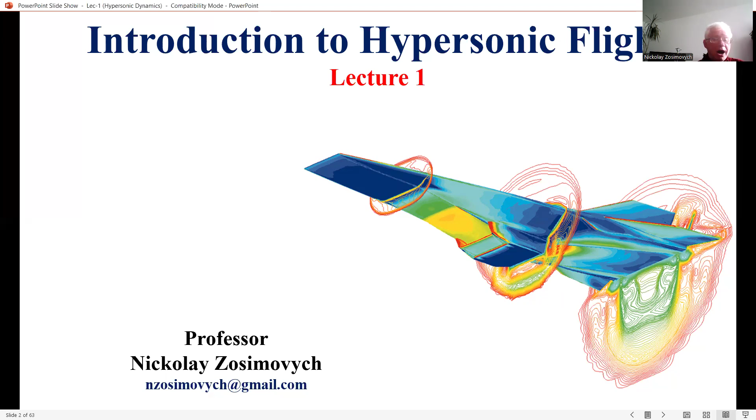These are more than just interesting questions. They are important questions that demand an answer, and this lecture supplies the answer. The preliminary truths supplied here set the stage and the tone for the rest of our discussions in this module.

A study of hypersonic flow is fun. It can be technically demanding at times, as we will see, but it can also be fun. So sit back, relax, and especially enjoy this first chapter. Let it give you a smooth takeoff on our flight through the worlds of hypersonic and high temperature gas dynamics, a flight that is both intellectually and professionally rewarding.

On this slide, you may see some of the recommended textbooks. Let's start with the basic history of hypersonic flight now.

The day is Thursday, 24 February 1949. The pens on the automatic plotting boards at South Station are busy tracking the altitude and course of a rocket, which just moments before had been launched from a site 3 miles away on the test range of the White Sands Proving Ground. The rocket is a V2, one of many brought to the United States from Germany after World War II. By this time, launching V2s had become almost routine for the crews at White Sands. But on this day, neither the launcher nor the rocket is routine.

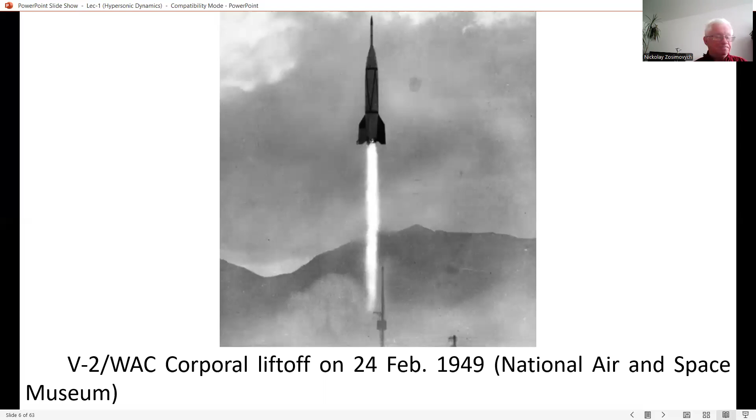The scene shifts to the former Soviet cosmodrome in Kazakhstan. The time is now 10:55 hours Moscow time on 12 April 1961. A strange spherical object has just landed under the canopy of a parachute. The surface of this capsule is charred black, and it contains 3 small viewing ports covered with heat-resistant glass. Inside this capsule is Flight Major Yuri Gagarin, who just 108 minutes earlier had been sitting on top of the rocket at the Soviet cosmodrome at Baikonur.

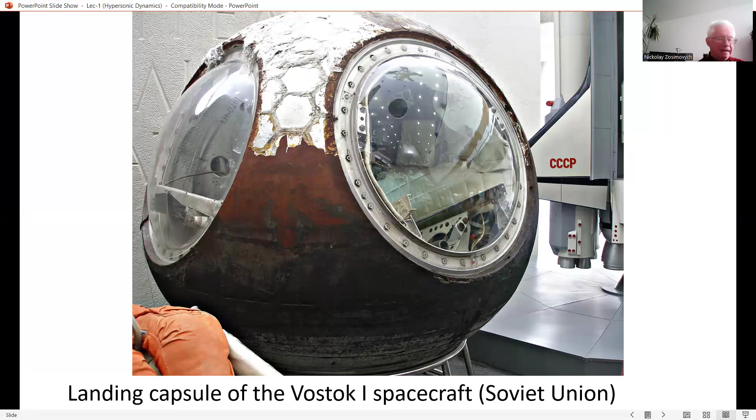What partially transpired during those 108 minutes is announced to the world by a broadcast from the Soviet news agency TASS at 9:59 a.m. After this announcement, Major Gagarin's orbital craft, Vostok 1, is slowed at 10:25 by the firing of a retro rocket and enters the atmosphere at a speed more than 24 times the speed of sound. 30 minutes later, Major Yuri Gagarin becomes the first man to fly in space, to orbit the Earth, and safely return. On that day, 12 April 1961, Yuri Gagarin becomes the first human being in history to experience hypersonic flight.

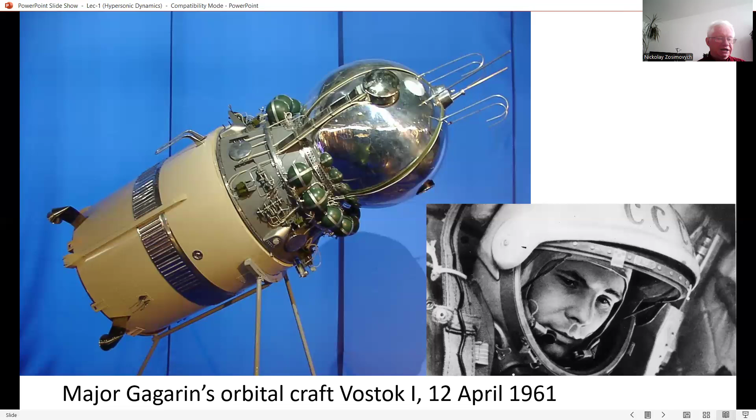On 5 May, Alan Shepard becomes the second man in space by virtue of a suborbital flight over the Atlantic Ocean, reaching an altitude of 115.7 miles and entering the atmosphere at speed above Mach 5.

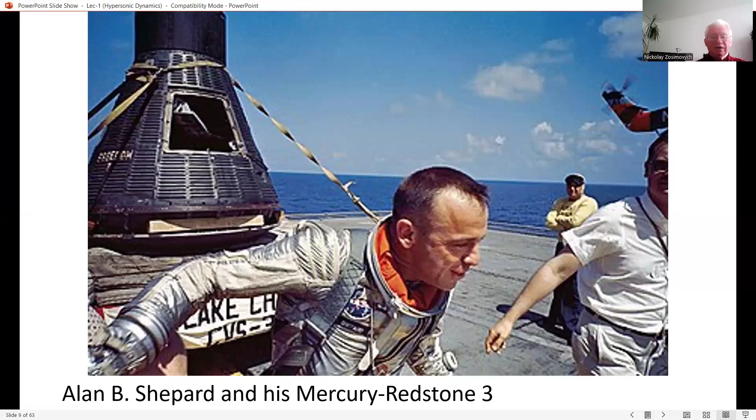Then on 23 June, US Air Force test pilot Major Robert White flies the X-15 airplane at Mach 5.3, the first X-15 flight to exceed Mach 5. In so doing, White accomplishes the first mile-per-second flight in an airplane, reaching a maximum velocity of 3,603 miles per hour. This record is extended by White on 9 November, flying the X-15 at Mach 6.

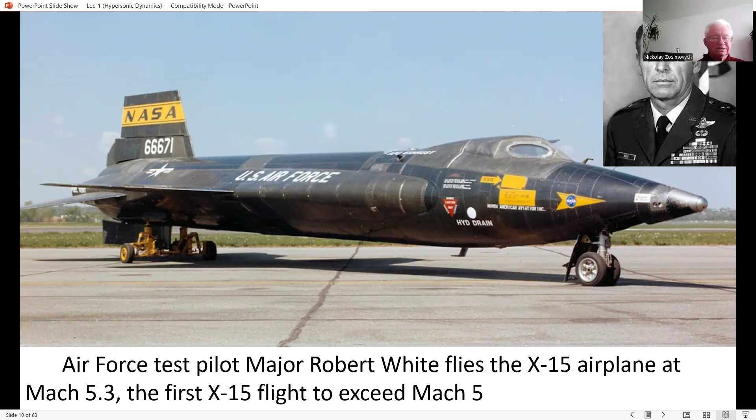The preceding events are historical firsts in the annals of hypersonic flight. They represent certain milestones and examples of the application of hypersonic aerodynamic theory and technology. The purpose of this lecture, our course here, is to present and discuss this theory and technology with the hope that the student and professional will be motivated and prepared to contribute to the hypersonic milestones of the future.

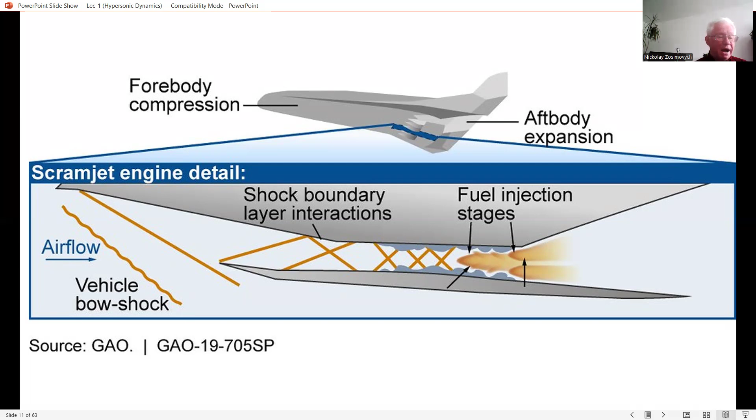Let's start with hypersonic flight importance. The development of aeronautics and spaceflight from its practical beginnings with the Wright brothers' first airplane flight on 17 December 1903, and Robert Goddard's first liquid-fueled rocket launch on 16 March 1926, has been driven by one primary urge: the urge to allow us to fly faster and higher.

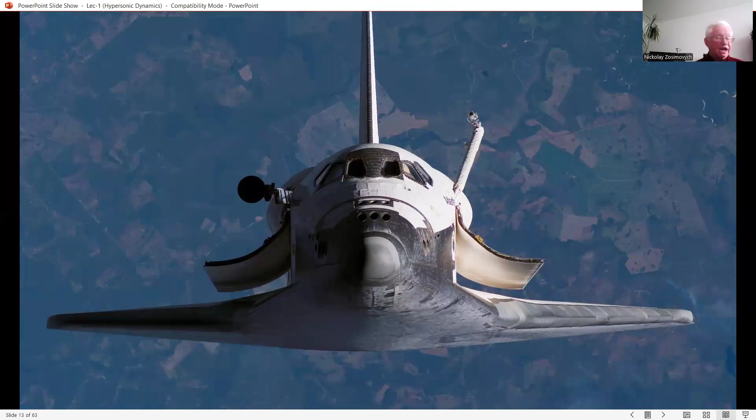Anyone who has traced advancements in aircraft in the 20th century has seen an exponential growth in both speed and altitude, starting with the 35 miles per hour Wright flyer at sea level in 1903, progressing to 400 mile per hour fighters at 30,000 feet in World War II, transitioning to 1,200 mile per hour supersonic aircraft at 60,000 feet in the 1960s and 1970s.

This was highlighted by the experimental X-15 hypersonic airplane, which achieved Mach 7 and an altitude of 354,000 feet on 22 August 1963, and finally capped by the Space Shuttle, the ultimate in manned airplanes, with its Mach 25 re-entry into the Earth's atmosphere from 200 miles low Earth orbit.

The point here is that the extreme high-speed end of the flight spectrum has been explored, penetrated, and utilized since the 1950s. Moreover, flight at this end of the spectrum is called hypersonic flight, and the aerodynamic and gas dynamic characteristics of such flight are classified under the label of hypersonic aerodynamics, one of the primary subjects of our lecture course.

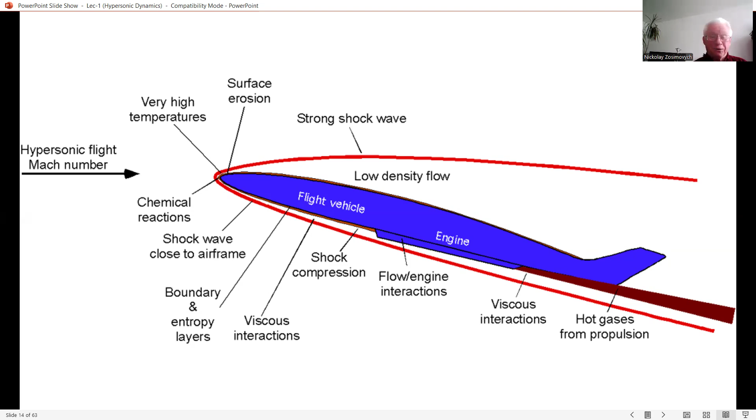Hypersonic aerodynamics is different from the more conventional and experienced regime of supersonic aerodynamics. These differences will be discussed at length in Lecture 3, along with an in-depth definition of just what hypersonic aerodynamics really means. However, we can immediately see that such differences must exist by comparing the shapes of hypersonic flight vehicles with those of more commonplace supersonic aircraft.

In this case, we may say the edges are almost sharp enough to pose a hazard during ground handling, with a low aspect ratio of 2.45 for the straight wing itself, all designed to minimize wave drag at supersonic speeds.

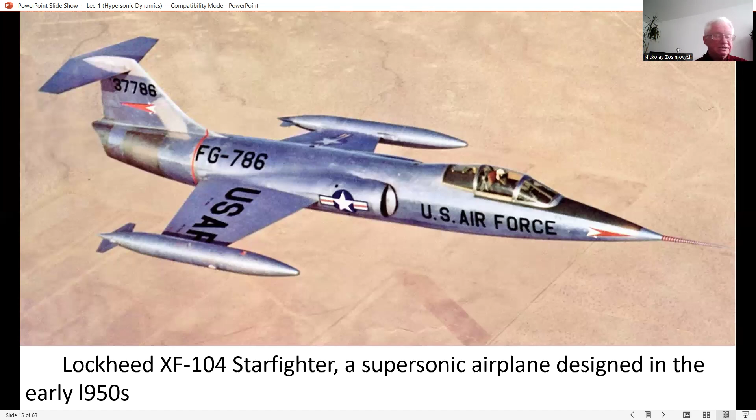To design a hypersonic aircraft for flight at much higher Mach number, it is tempting to utilize these same design principles, only more so. Indeed, such was the case for an early hypersonic aircraft concept.

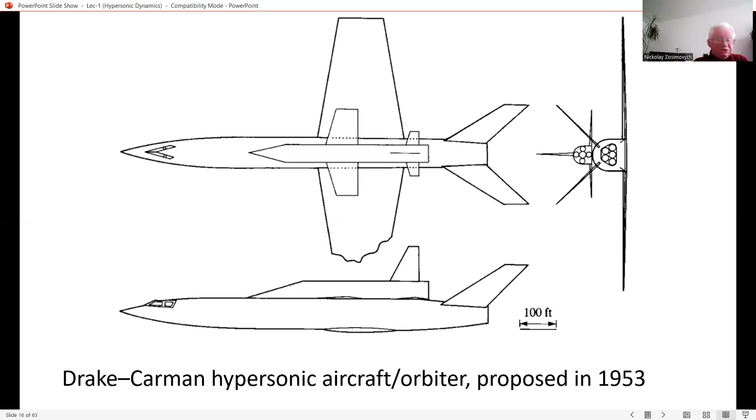Here we see an early concept for a hypersonic booster or orbiter combination, where each aircraft has a sharp nose, slender fuselage, and thin, low aspect ratio straight wings—the same fuselage features seen in the F-104, except the aircraft in this slide is designed for Mach 25. Imagine that. However, in 1953, hypersonic aerodynamics was in its infancy.

The X-20 design utilized a sharply swept delta wing with a blunt, rounded leading edge and a rather thick fuselage, with a rounded rather than sharp nose. The fuselage was placed on top of the wing so that the entire undersurface of the vehicle was flat.

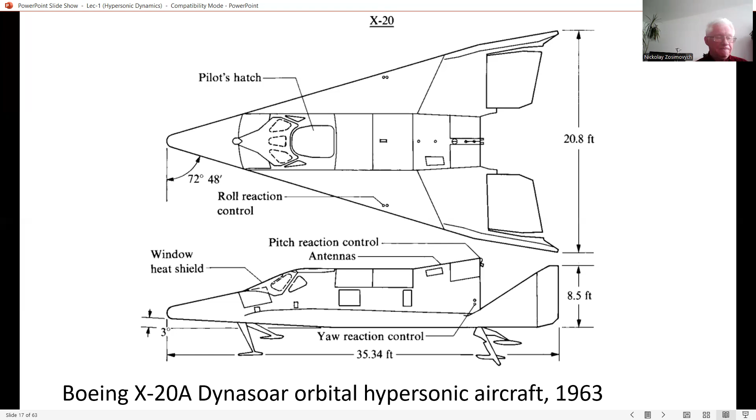The X-20 was intended to be an experimental aircraft for rocket-powered flight at Mach 20. Eclipsed by the Mercury, Gemini, and Apollo manned spacecraft programs, the X-20 project was cancelled in 1963 without the production of a vehicle. However, the X-20 reflected design features that were uniquely hypersonic and were later contained in the space shuttle.

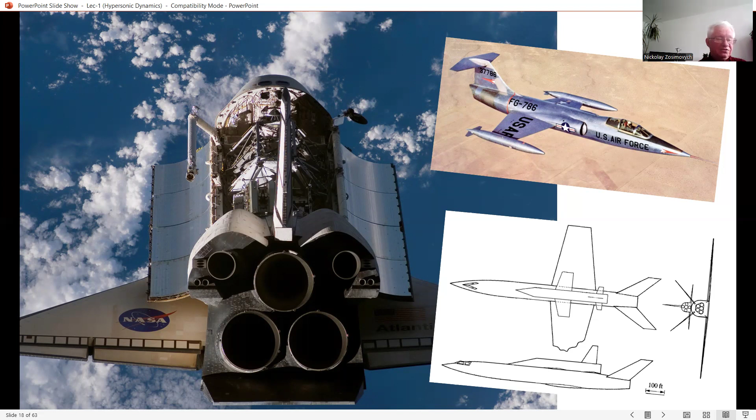To be objective, we must realize that many considerations besides high-speed aerodynamics go into the design of the vehicles shown in this slide. However, to repeat once again, the important point here is that hypersonic vehicles are different than supersonic vehicles, and this is in part because hypersonic aerodynamics is different from supersonic aerodynamics. Be careful with this, okay?

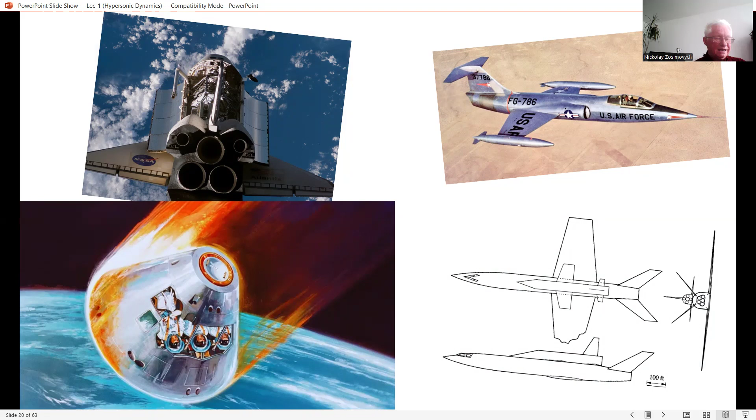Hypersonic flight, both manned and unmanned, has been successfully achieved. However, at the time of this lecture, it is by no means commonplace. The era of practical hypersonic flight is still ahead of us, and it poses many exciting challenges to aerodynamicists. Let us briefly examine some new ideas for modern hypersonic vehicles.

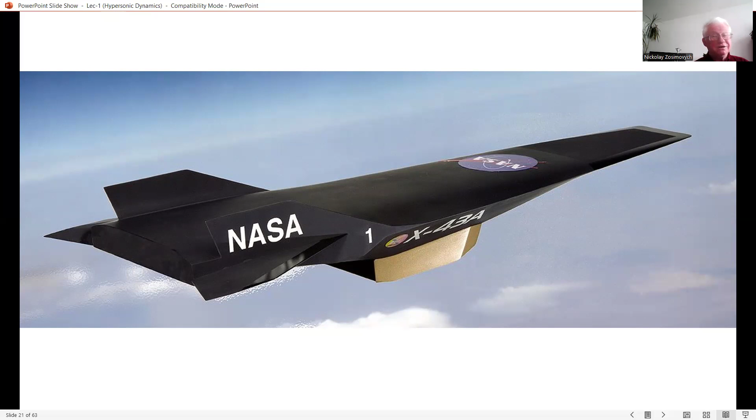For example, air-breathing hypersonic vehicles designed for sustained flight in the atmosphere have captured the imagination of aerospace engineers and mission planners alike. One concept is that of an aerospace plane, ideally an aircraft designed to take off horizontally from a runway and then accelerate into orbit around the Earth.

For the most part powered by an air-breathing supersonic combustion ramjet engine, sometimes called a scramjet, with most likely a rocket assist for final insertion into orbit, it will subsequently carry out a mission in orbit or within the outer regions of the atmosphere, and then re-enter the atmosphere at Mach 25, finally landing under power on a conventional runway.

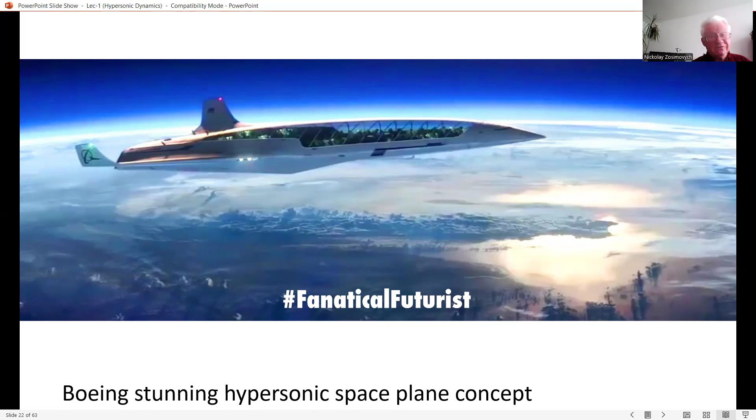This idea was first seriously examined by the US Air Force in the early 1960s, and the combination of air-breathing and rocket propulsion was intended to power the vehicle. Work on the early aerospace plane was cancelled in October 1963, mainly because the design requirements exceeded the state of the art of the time.

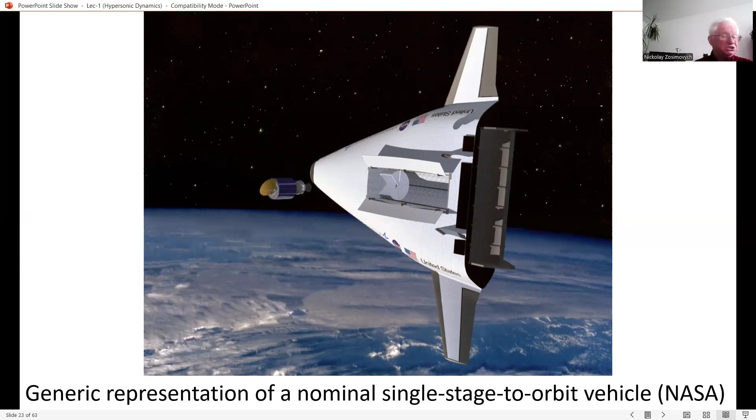It too was terminated in the mid-1990s, after a decade of intensive research and development. The reason was the same: the design requirements exceeded the state of the art. And this work lives on, however, in the form of more modest but focused research and technology advancement efforts.

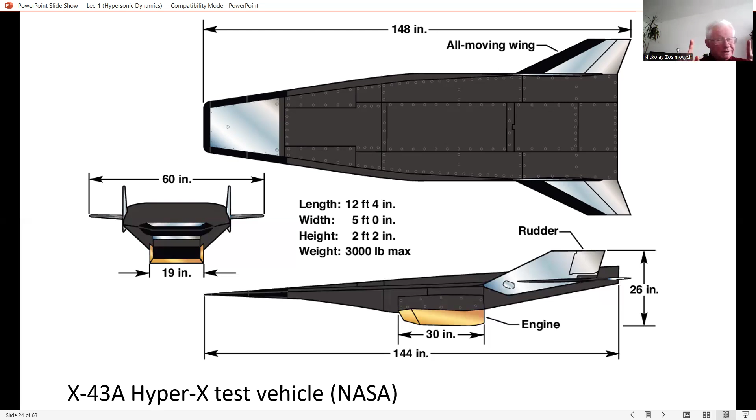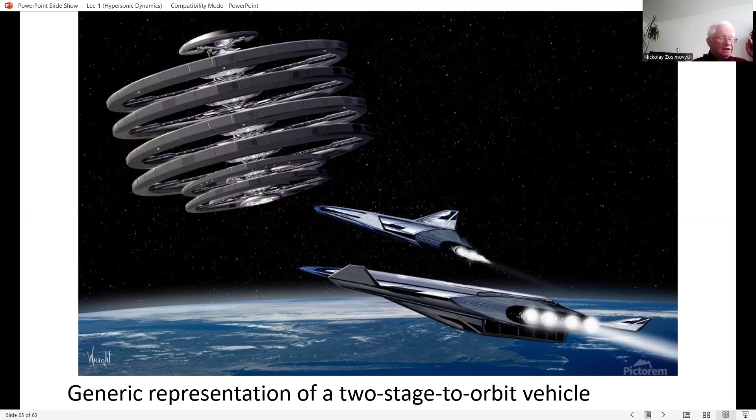Finally, let's briefly mention the possibility of hypersonic commercial air transportation. At the time of this speaking, there is no active program to develop even a second-generation supersonic transport to replace the retired Anglo-French Concorde SST. So, is a hypersonic transport only a pipe dream? How do you think? I think it's not exactly.

It is important to mention an aspect that distinguishes hypersonic atmospheric flight vehicles from conventional subsonic and supersonic airplane design philosophy. For subsonic and supersonic aircraft, the components for providing lift (the wings), propulsion (the engines and nacelles), and volume (the fuselage) are not strongly coupled with each other. They are separate and distinct components, easily identifiable by looking at the airplane, and can be treated as separate aerodynamic bodies with only moderate interaction when combined in the total aircraft.

Moreover, most of the lift is produced by the high pressure behind the bow shock wave, exerted on the relatively flat undersurface of the vehicle. The use of large, distinct wings is not necessary to produce high lift. Finally, the fuel for air-breathing hypersonic airplanes is liquid hydrogen, which occupies a large volume. All of these considerations combine in a hypersonic vehicle such that the components to generate lift, propulsion, and volume are not separate from each other. Rather, they are closely integrated in the same overall lifting shape, in direct contrast to conventional subsonic and supersonic vehicle design.

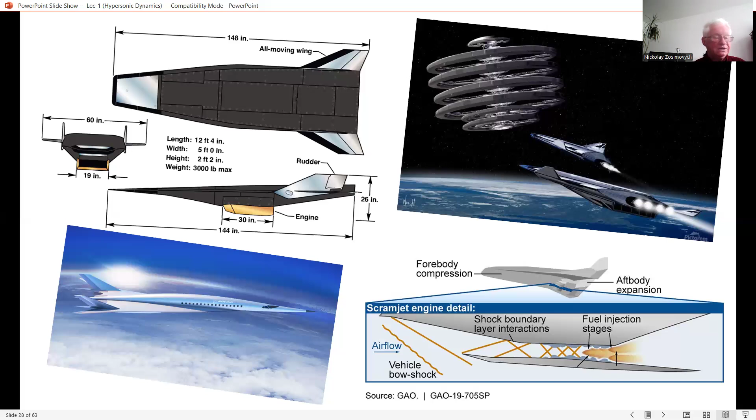Finally, return to the question asked at the beginning of this lecture: hypersonic flow, why is it important? We now have a feeling for the answer. Hypersonic flow is important because, first, it is physically different from supersonic flight, and second, it is the flow that will dictate many of the new, exciting vehicle designs for the 21st century.

Recognizing this importance, the purpose of the present lecture and all our course is to introduce our students to the basic fundamentals of hypersonic flow, including an emphasis on high temperature gas dynamics, which, as we will see, is an important aspect of high speed flows in general. Wherever appropriate, we will also discuss modern experimental and computational fluid dynamic applications in hypersonic and high temperature flow, as well as certain related aspects of hypersonic vehicle design. Such material is an integral part of modern aerodynamics, and its importance will grow steadily into the 21st century as we continue to extend the boundaries of practical flight.

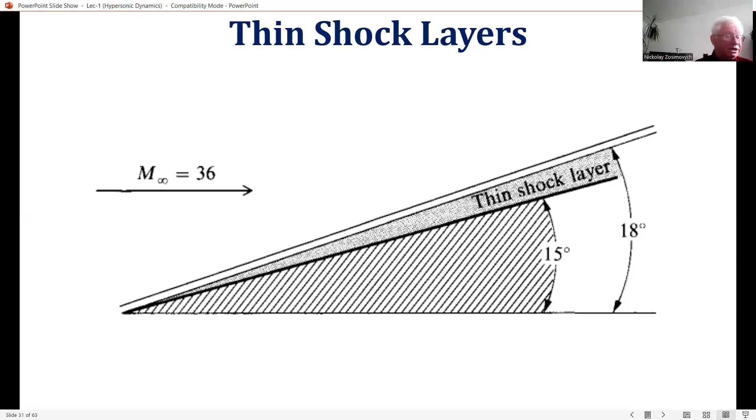In the extreme, a thin shock layer approaches the fluid dynamic model postulated by Isaac Newton in 1687. Such Newtonian theory is simple and straightforward, and is frequently used in hypersonic aerodynamics for approximate calculations.

In the nose region, the shock wave is highly curved. Recall that the entropy of the flow increases across a shock wave, and the stronger the shock, the larger the entropy increase. A streamline passing through the strong, nearly normal portion of the curved shock, near the center line of the flow, will experience a larger entropy increase than a neighboring streamline, which passes through a weaker portion of the shock farther away from the center line.

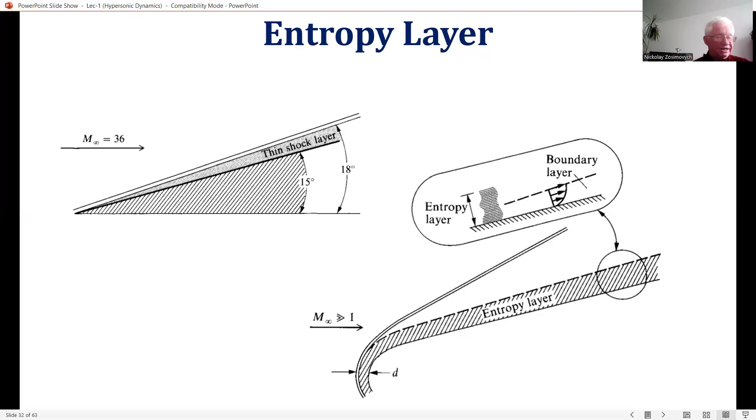For example, the viscosity coefficient increases with temperature, and this by itself will make the boundary layer thicker. In addition, because the pressure P is constant in the normal direction through a boundary layer, the increase in temperature T results in a decrease in density rho through the equation of state. I hope you remember rho proportional to P over RT, where R is the specific gas constant. To pass the required mass flow through the boundary layer at reduced density, the boundary layer thickness must be larger.

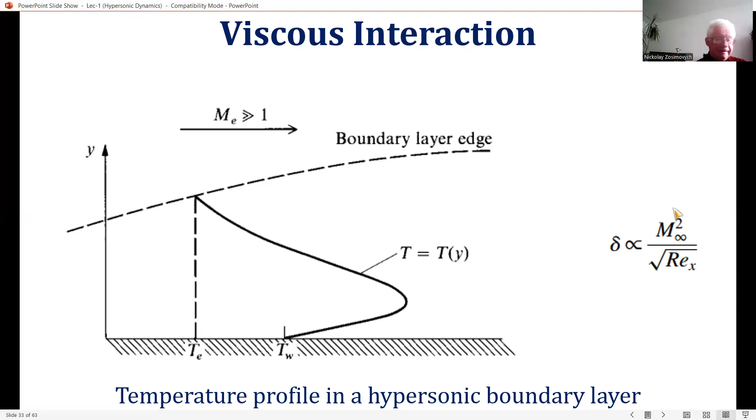Both of these phenomena combine to make hypersonic boundary layers grow more rapidly than at slower speeds. Indeed, the flat plate compressible laminar boundary layer thickness delta grows essentially as delta proportional to M squared over square root of Reynolds number, where M is the free stream Mach number and Reynolds sub x is the local Reynolds number. So clearly, because delta varies as the square of M, it can become inordinately large at hypersonic speeds. And this thick boundary layer in hypersonic flow can exert a major displacement effect on the inviscid flow outside of the boundary layer, causing a given body shape to appear much thicker than it really is.

Because of the extreme thickness of the boundary layer flow, the outer inviscid flow is greatly changed. The changes in the inviscid flow in turn feed back to affect the growth of the boundary layer. This major interaction between the boundary layer and outer inviscid flow is called viscous interaction. Viscous interactions can have important effects on the surface pressure distribution, hence lift, drag, and stability on hypersonic vehicles. Moreover, skin friction and heat transfer are increased by viscous interaction.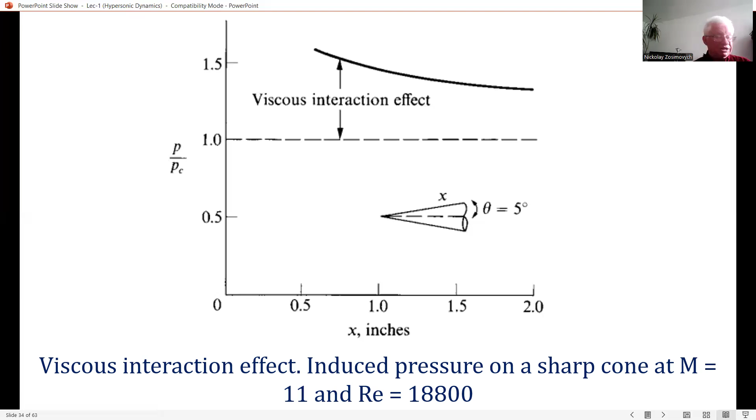Now let's come to the next sub-question, high temperature flows. As discussed earlier, the kinetic energy of a high-speed hypersonic flow is dissipated by the influence of friction within a boundary layer. The extreme viscous dissipation that occurs within hypersonic boundary layers can create very high temperatures, high enough to excite vibrational energy internally within molecules and to cause dissociation and even ionization within the gas.

If the surface of a hypersonic vehicle is protected by an ablative heat shield, the products of ablation are also present in the boundary layer, giving rise to complex hydrocarbon chemical reactions. On both accounts, we see that the surface of a hypersonic vehicle can be wetted by chemical reaction in the boundary layer. The boundary layer is not the only region of high temperature flow over a hypersonic vehicle.

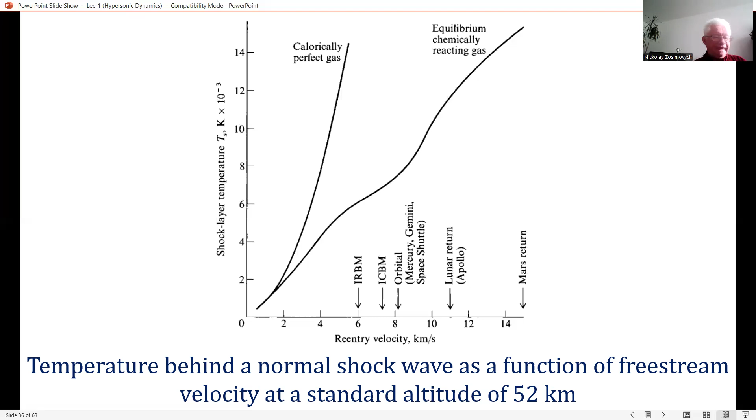High temperature chemically reacting flows can have an influence on lift, drag, and moments on a hypersonic flight. For example, such effects have been found to be important for estimating the amount of body flap deflection necessary to trim the space shuttle during high-speed re-entry.

However, by far the most dominant aspect of high temperatures in hypersonics is the resultant high heat transfer rate to the surface. Aerodynamic heating dominates the design of all hypersonic machinery, whether it be a flight vehicle, a ramjet engine to power such a vehicle, or a wind tunnel to test the vehicle.

This aerodynamic heating takes the form of heat transfer from the hot boundary layer to the cooler surface, called convective heating and denoted by QC in this figure. You may find QC as a downward arrow in this figure.

Moreover, if the shock layer temperature is high enough, the thermal radiation emitted by the gas itself can become important, giving rise to a radiative flux to the surface, called radiative heating and denoted by QR, shown on the right side from QC in this figure.

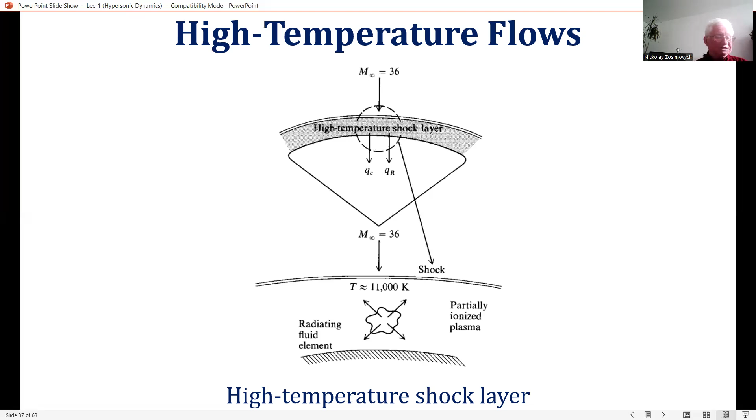Another consequence of high temperature flow over hypersonic vehicles is the communications blackout experienced at certain altitudes and velocities during atmospheric entry, where it is impossible to transmit radio waves to or from the vehicle. This is caused by ionization in the chemically reacting flow, producing free electrons, which absorb radio frequency radiation. Therefore, the accurate prediction of electron density within the flow field is important.

Clearly, high temperature effects can be a dominant aspect of hypersonic aerodynamics. Because of this importance, Lecture 3 of this course is devoted entirely to high temperature gas dynamics. Lecture 3 is self-contained and represents a study of high temperature gas dynamics in general, a field with applications that go far beyond hypersonics, such as combustion, high-energy lasers, plasmas, and laser-matter interaction, to name just a few.

Also, the distance between collisions is different for each individual collision. Over a period of time, there will be some average distance the molecule moves between successive collisions. This average distance is defined as the mean free path, denoted by lambda.

At standard sea level conditions for air, lambda equals 2.176 times 10 to the power minus 7 feet — a very small distance. This implies that at sea level, when you wave your hand through the air, the gas itself feels like a continuum medium. Most aerodynamic problems, more than 99.9% of all applications, are properly addressed by assuming a continuous medium.

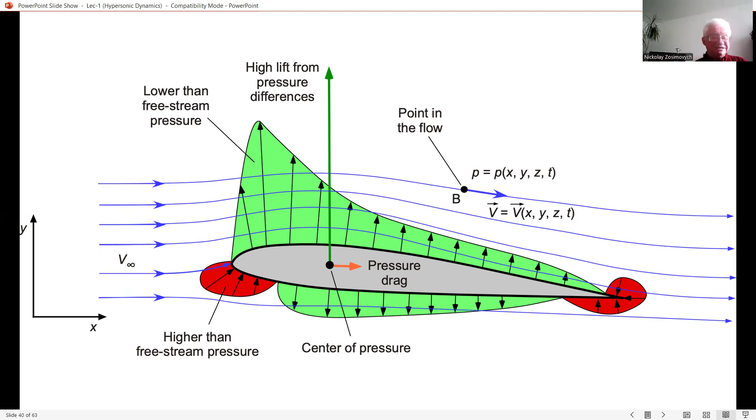Indeed, all of our preceding discussion has so far assumed that the flow is continuum. Imagine now that we are at an altitude of 342,000 feet, where the air density is much lower, and consequently the mean free path is much larger than at sea level. Indeed, at 342,000 feet, lambda equals only 1 foot.

Now, when you wave your hand through the air, you are more able to feel individual molecule impacts, and the air no longer feels like a continuous substance, but rather like an open region punctured by individual, widely spaced particles of matter. Under these conditions, the aerodynamic concepts, equations, and results based on the assumption of a continuum begin to break down. When this happens, we have to approach aerodynamics from a different point of view, using concepts from kinetic theory. This regime of aerodynamics is called low-density flow.

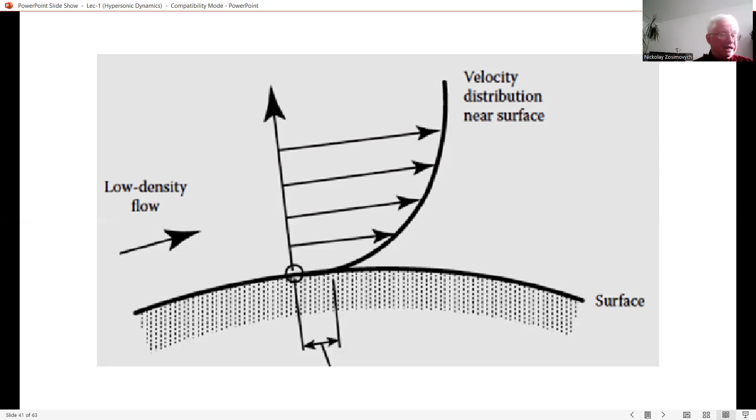There are certain hypersonic applications that involve low-density flow, generally involving flight at high altitude. For example, as noted in some publications, the flow in the nose region of the space shuttle cannot be properly treated by purely continuum assumptions for altitudes above 92 kilometers — about 300,000 feet.

For any given flight vehicle, as the altitude progressively increases, and hence the density decreases, and lambda increases, the assumption of a continuum flow becomes tenuous. An altitude can be reached where the conventional viscous flow, no-slip conditions begin to fail. Specifically, at low densities, the flow velocity at the surface, which is normally assumed to be zero because of friction, takes on a finite value. This is called the velocity slip condition.

In analogous fashion, the gas temperature at the surface, which is normally taken as equal to the surface temperature of the material, now becomes something different. This is called the temperature slip condition.

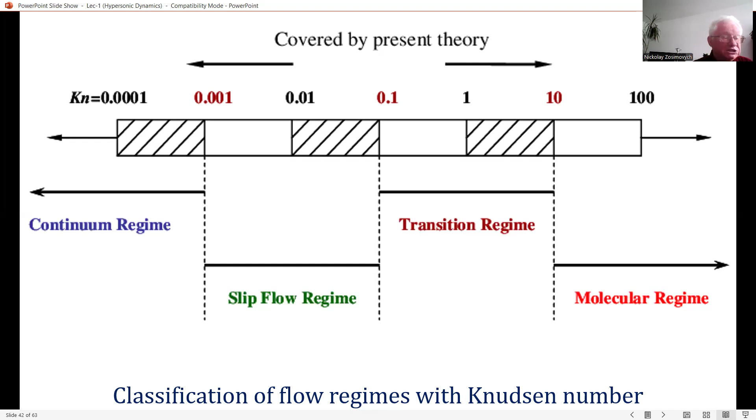The similarity parameter that covers these different regimes is the Knudsen number, defined as Kn, proportional to lambda over L. L here is a characteristic dimension of the body. The values of Knudsen number for different regimes are noted in this figure.

Note the region where the continuum Navier-Stokes equations hold is described as Knudsen number no higher than 0.2. However, slip effects must be included in these equations when Knudsen number is higher than 0.03. The effects of free molecular flow region occur around a value of Knudsen number of 1 and extend out to the limit of Knudsen number becoming infinite. Hence, the transitional regime is essentially contained between 0.03 and 1. We have continuum flow if Knudsen number is very small, and we have free molecular flow if Knudsen number is very large, and so forth.

A hypersonic vehicle entering the atmosphere from space will encounter the full range of these low density effects, down to an altitude below which the full continuum aerodynamics takes over. Because, remember, Knudsen number proportional to lambda over L is the governing parameter, that altitude below which we have continuum flow is greater or lesser as the characteristic length L is larger or smaller. Moreover, if we let the characteristic length be the running distance x from the nose or leading edge of the vehicle, then Knudsen number will be lambda over x, and becomes infinite when x equals 0. Look at this part of it.

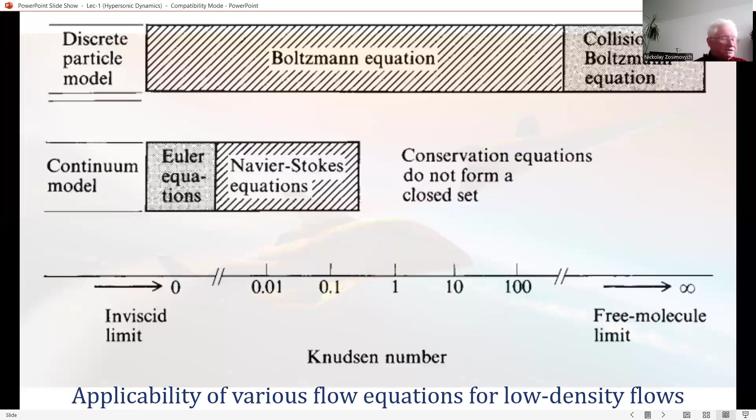For any vehicles at any altitude, the flow immediately at the leading edge is governed by low density effects. For most practical applications in aerodynamics, this leading edge region is very small and is usually ignored. However, for high altitude hypersonic vehicles, the proper treatment of the leading edge flow by low density methods can be very important. To consider low density effects as part of the definition of hypersonic aerodynamics might be stretching that definition too much. Recall that we are defining hypersonic aerodynamics as the regime where certain physical flow phenomena become progressively more important as the Mach number is increased to high values.

Low density effects are not per se a Mach number effect. However, low density effects are included in our discussion because some classes of hypersonic vehicles, because of their high Mach number, will fly at or through the outer regions of the atmosphere and hence will experience such effects to a greater or lesser extent.

So let's recap. To repeat, hypersonic flow is best defined as a regime where all or some of the preceding physical phenomena become important as the Mach number is increased to high values. To help reinforce this definition, the figure on this slide summarizes the important physical phenomena associated with hypersonic flight. Throughout our course, fundamental aspects and practical consequences of these phenomena will be emphasized.

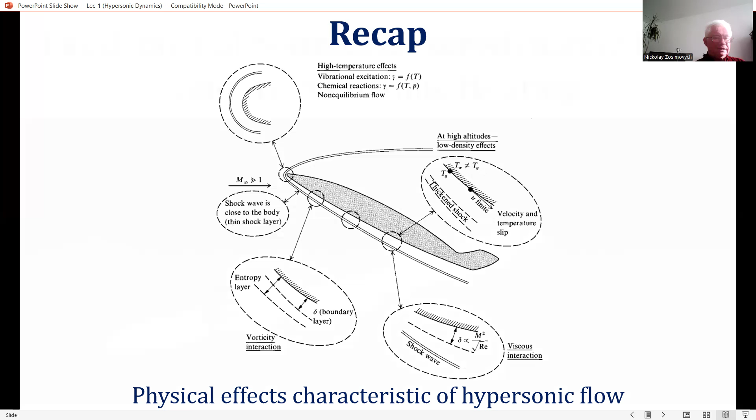Okay, now let's start another topic of today's lecture. It's called Fundamental Sources of Aerodynamic Force and Aerodynamic Heating. Any object immersed in a flowing gas experiences a force as a result of the interaction of the body with the gas, the aerodynamic force illustrated by the vector R in this figure. The two components of R, perpendicular and parallel to the relative wind far ahead of the body, are lift and drag respectively, as shown in this figure.

Similarly, R can be resolved into two components perpendicular and parallel to the chord or axis of the body, the normal force N and the axial force A respectively. These forces are usually couched in terms of force coefficients.

Defining the dynamic pressure Q as half rho times V squared, where rho and V are the free stream density and velocity respectively, and choosing some reference area S, we have by definition the lift coefficient CL proportional to L over Q times S, and drag coefficient CD proportional to drag over Q times S, and normal force coefficient Cn proportional to normal force over Q times S, or axial force coefficient Ca proportional to A over Q times S, and analogically the moment coefficient proportional to moment m over Q times S.

In addition, consider any point on the body, and the resultant force can create a moment about this point that we denote. Here C in our equation is a characteristic length of the body, such as the chord length, as shown in the previous figure.

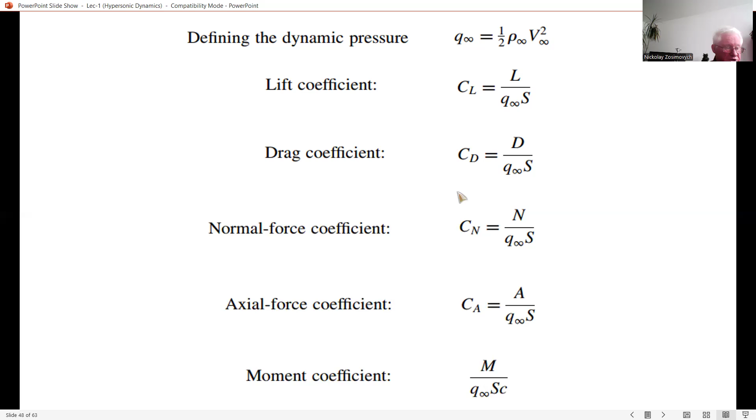How does nature exert an aerodynamic force on the body? To help answer this question, pick up a book and hold it stationary in the palm of your hand. You are exerting a force on the book equal to its weight. This force is communicated to the book by the skin of your hand being in contact with the bottom cover of the book. This is the only way that the book knows that you are exerting a force on it, by contact of the book surface with your hand.

Similarly, the surface of the body in figure A on the left side is in contact with the air, the molecular layer of air immediately adjacent to the body surface. The only way that the body feels the presence of the air is through the pressure distribution and shear stress distribution exerted on the body surface that is in contact with the air.

As illustrated in figure B on the right side, the pressure acts locally normal to the body surface, and shear stress, which is caused by friction between the body and the molecular layer of air just adjacent to the body surface, acts locally tangential to the surface.

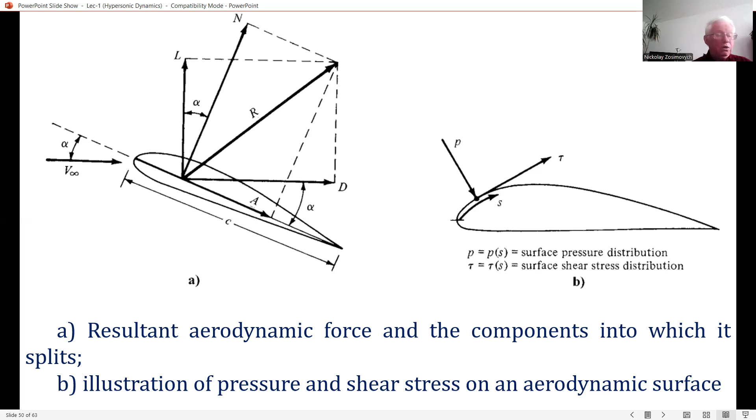Except in cases where viscous interaction is dominant or flow separation takes place, the surface pressure distribution is essentially by nature an inviscid flow phenomenon. Part 1, lectures 2 to 5 of our course, deals with hypersonic inviscid flow. Much of the material in Part 1 focuses on calculating pressure distributions over the surface of hypersonic aerodynamic shapes, leading to the prediction of lift and wave drag, a pressure effect.

Shear stress is a viscous flow phenomenon. Part 2, lectures 6 to 8 of our course, deals with viscous flow. Some of the material in Part 2 focuses on calculating the shear stress distribution over the surface of hypersonic aerodynamic shapes, leading to the prediction of skin friction drag.

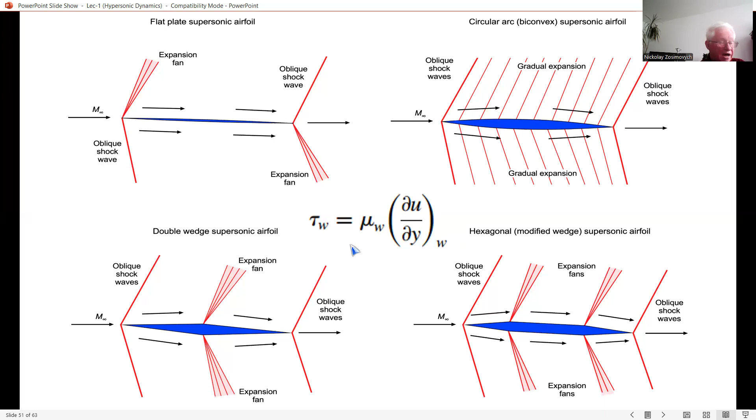The surface shear stress is dictated by the velocity gradient at the surface. You see this expression: du over dy at the wall is the velocity gradient at the wall, and mu sub W is the viscosity coefficient at the wall. Any object immersed in flowing gas also experiences heat transfer at the body surface.

For most practical cases in high-speed aerodynamics, heat is transferred from the gas into the body, aerodynamic heating. For low-speed subsonic flows, aerodynamic heating is small and not generally a player. For supersonic flows, however, aerodynamic heating becomes a consideration. For hypersonic flows, aerodynamic heating is a major player, so much so that it dictates the configuration design of most hypersonic vehicles.

The sources of aerodynamic heating to a body are related to the hot gas in the flow field around the body. The boundary layer adjacent to the body surface is hot because the high kinetic energy hypersonic flow entering the boundary layer is slowed by viscous effects within the boundary layer, dissipating the kinetic energy and transforming it in part into internal energy of the gas. The gas in the inviscid portion of the shock layer between the shock wave and the body is hot because it has come through a strong shock wave.

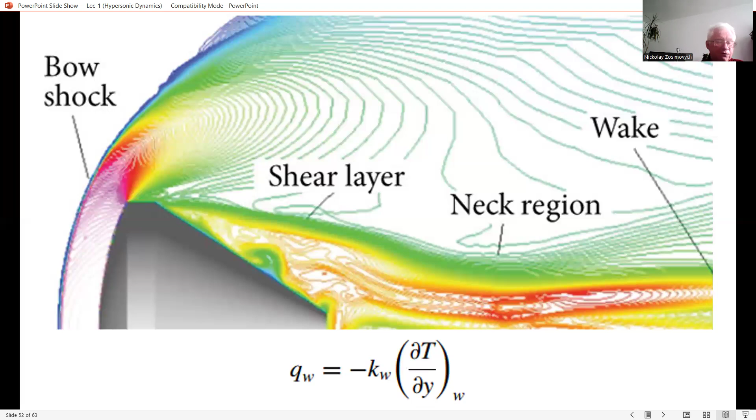The hand of nature that does this is not the temperature of the gas at the wall, but rather the temperature gradient in the gas at the wall. Part 2 of our course deals in part with the calculation of temperature gradients at the wall, and hence the conductive heat transfer at the surface.

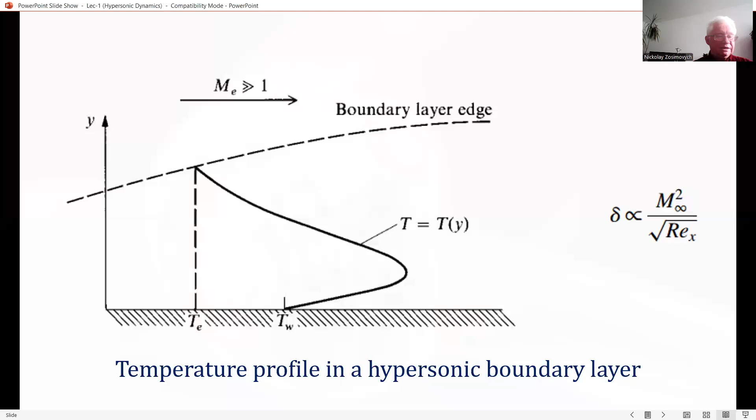Thermal radiation is the other hand that nature uses to heat or cool a body. If the temperature of the flow field around a body is hot enough, significant thermal radiation from the gas to the body takes place. How hot is hot enough? For air, if the shock layer temperature is about 10,000 Kelvin or higher, radiative heat transfer from the hot shock layer to the cooler body becomes a player in the overall heating of the body.

Examples are space vehicles entering the Earth's atmosphere at superorbital velocity, such as the Apollo lunar return capsule, where the shock layer temperature reaches as high as 11,000 Kelvin. Almost 30% of the total heat transfer to the Apollo during atmospheric entry was caused by radiative heating.

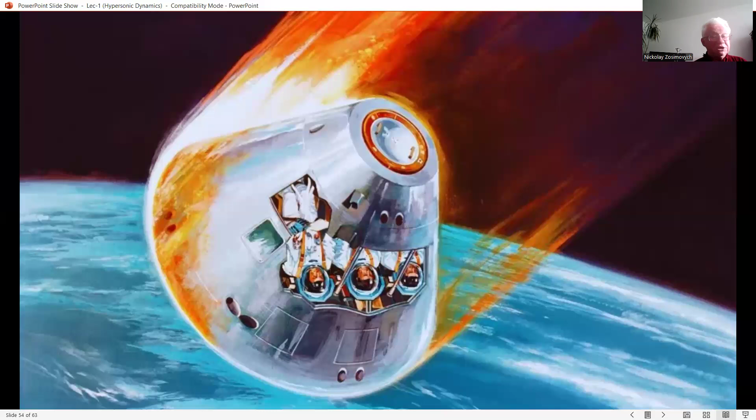For the Galileo probe entering the Jovian atmosphere at 47 kilometers per second, where the shock layer temperature exceeds 15,000 Kelvin, more than 95% of the total heat transfer was radiative heating. Radiative heating will be treated in lecture 18.

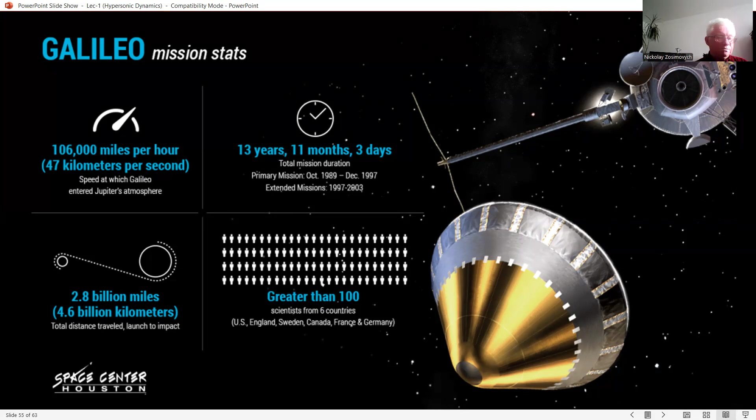We should note that the solid surface of the body radiates energy away from the surface. This is a form of cooling of the surface, radiative cooling. Solid bodies emit radiation primarily in the infrared part of the spectrum.

Imagine when you stand in front of a fireplace, comfortably sitting on a cold winter day, and enjoy the heat from the fire. Most of the heat you are feeling is coming from infrared radiation emitted from the hot bricks or stone of the walls of the fireplace.

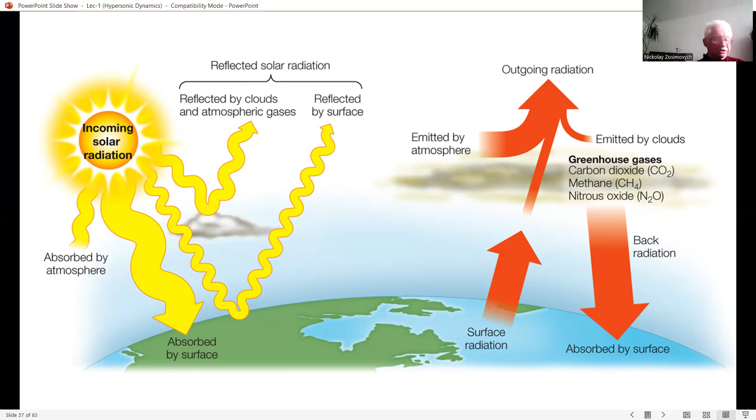Moreover, the radiative energy emitted from the surface of a solid body is a function of the surface temperature, following the T to the power 4 variation of a black body. Surface radiation, therefore, can be used effectively as part or all of the thermal protection mechanism for hypersonic flight.

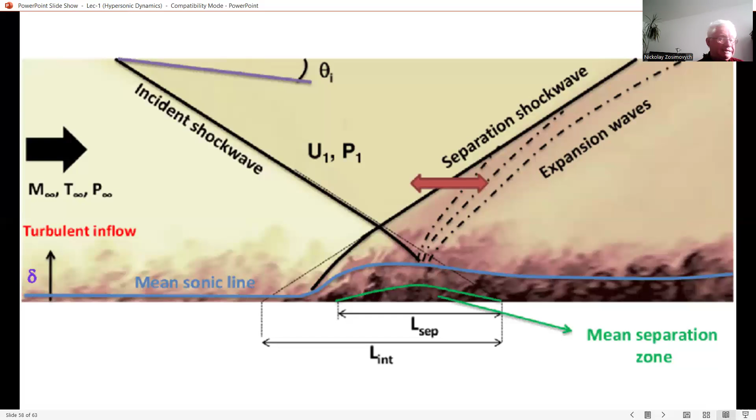In summary, the two sources of aerodynamic heating are: the temperature gradient in the gas at the body surface, adding heat to the body by means of thermal conduction, and the hot temperature that exists globally through the shock layer, adding heat to the body by means of thermal radiation from each hot fluid element in the flow field. Frequently, the former mode of heating is called convective heating. Thermal conduction at the surface is the hand that nature uses to transfer the energy to the surface. The latter mode of heating is simply called radiative heating.

Now let's start another topic in today's lecture called the hypersonic flight path from the velocity-altitude map. This is a course on hypersonic and high temperature gas dynamics, and we must keep in mind that the frequent application of this material is to design and understand hypersonic flight vehicles. In turn, it is helpful to have some knowledge of flight paths of these vehicles through the atmosphere and the parameters that govern such flight paths. This is the purpose of the present section.

Summing forces along and perpendicular to the curvilinear flight path, we obtain the following equations of motion from Newton's second law. Along the flight path: W times sine theta minus drag equals m times dv/dt, the acceleration. Perpendicular to the flight path: L minus W times cosine theta equals minus m times v squared over r, where r is the local radius of curvature of the flight path.

For most entry conditions, theta is small, so we assume sine theta approximately equals 0 and cosine theta approximately equals 1. With mass equal to W over G, the first equation becomes: minus drag is proportional to W over G times dV/dt, the acceleration. The next equation becomes: L minus W is proportional to minus W over G times V squared over R.

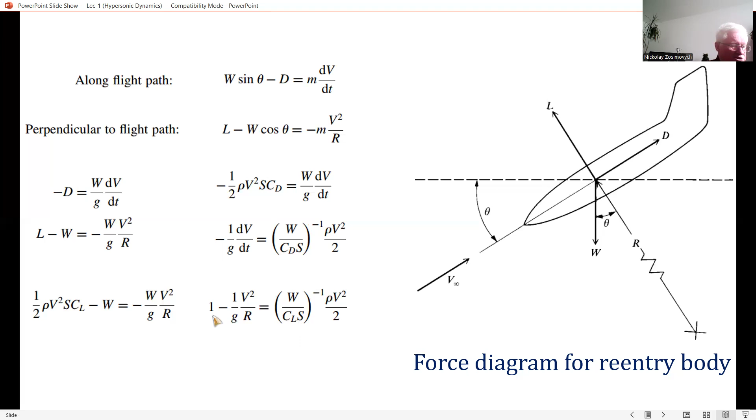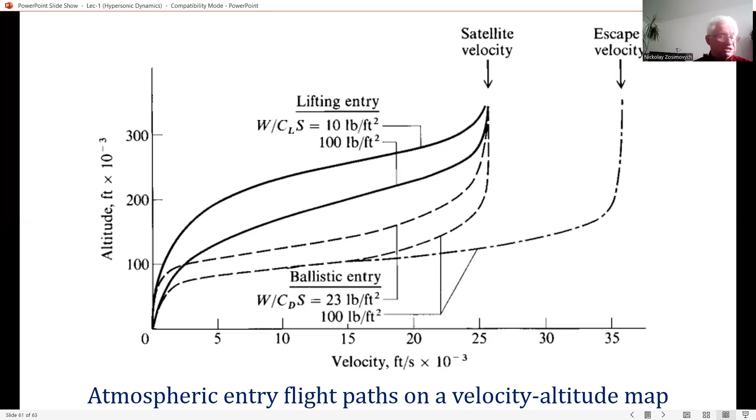So let's give some summary. The major purposes of this lecture have been motivation and orientation — motivation as to the importance, interest, and challenge associated with hypersonic aerodynamics, and orientation as to what hypersonic entails. For the remainder of this course, our purpose is to present and discuss the important fundamental aspects of hypersonic and high-temperature gas dynamics, and to highlight various practical applications as appropriate.